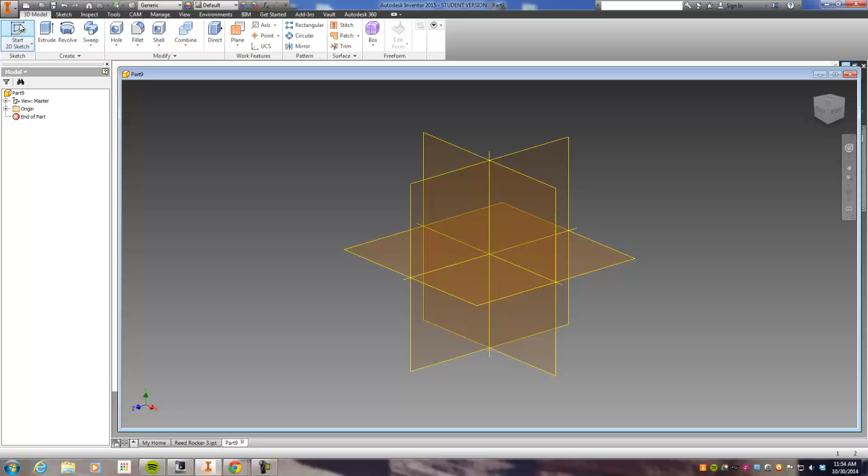I'm just going to click 2D Sketch, top part of that button, just pick this XY plane. It doesn't really matter where you start from, but here's a rectangle. Let's say the first piece you have to make is 18 inches, so you see this box is blue.

It says 0.960 - you can just type in right on your keyboard, 18 inches long, tab key, gives you the second box down there which is 2 inches wide, then hit enter. If you use the scroll wheel on your mouse, you can scroll in and out, and if you push the mouse button down you can grab hold and move it so you can see stuff. What I did right there is I made an 18 by 2 inch piece, and that's the side of one of the bird feeders, so that's it.

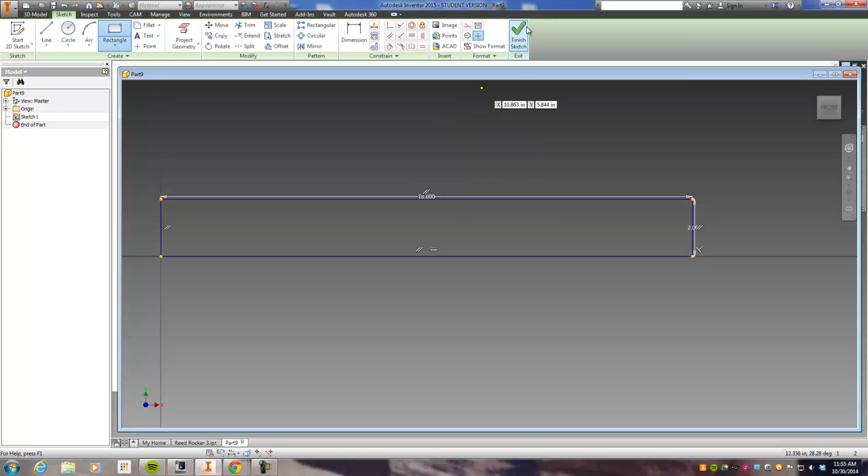So I can use the hotkey, which is E for extrude, or I can click finish sketch - zoom out a little bit so I see what I'm doing, and click extrude. All the thickness of this sheet metal is 1/16 of an inch, which is 0.0625, and then hit OK. That's it.

That's one of your parts. Save. Side, front, something like that. Save. Maybe you need a hole in this thing.

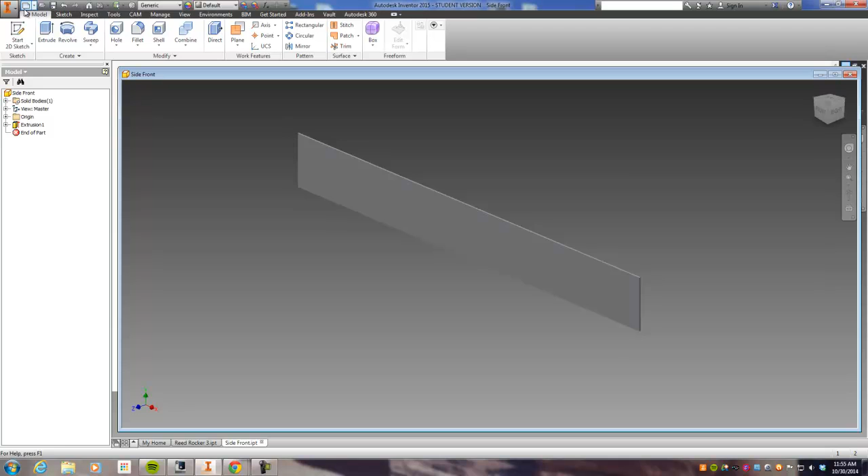We'll create another one, a whole new part file - that's one of your pieces. Now just repeat, make another one, and this one will be start 2D sketch.

Same thing, rectangle - I like to start from the origin, but you don't have to. This one is only 6 inches deep, 2 inches wide, and I'm getting all these dimensions from the sketch that I already created. But this one needs a little hole in the middle of it.

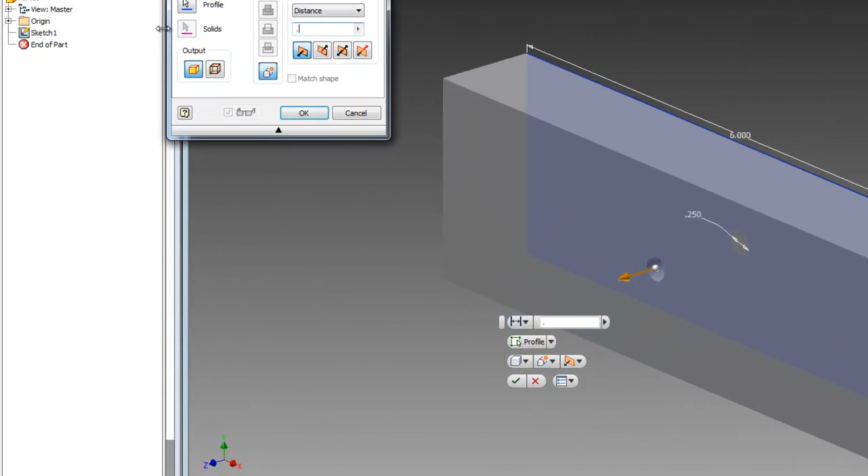So I'm just going to create a circle. I could go down and see these little hairlines that help you - that's the center of this thing. The hole is 1/4 of an inch because all the dowels are 1/4 of an inch, and then you'd just go finish sketch, extrude, 0.0625, enter, and now you have another piece made.

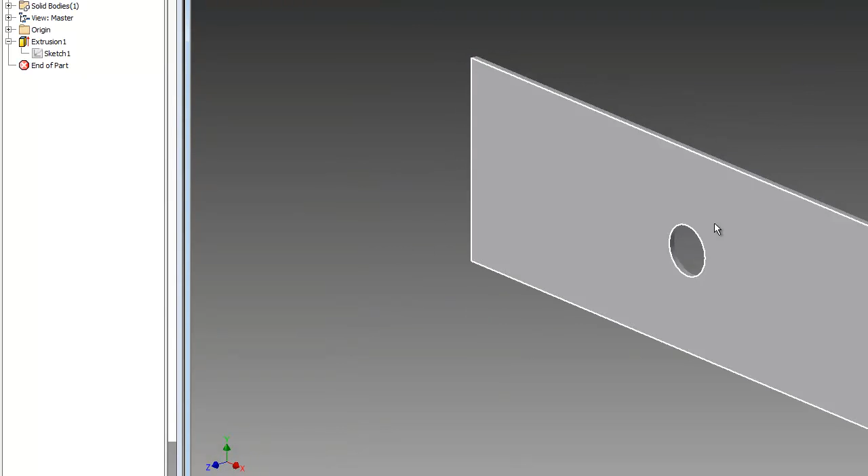If you ever have to go back and edit something, it's over here - the little plus sign of the extrusion you just made, and here's the sketch. You can double click it, it brings you back into that sketch. So if I ever need to fix something, like the size of that thing needs to be 1/2 inch for whatever reason, when I finish sketch it changes the hole. Okay, I'm going to fix that back.

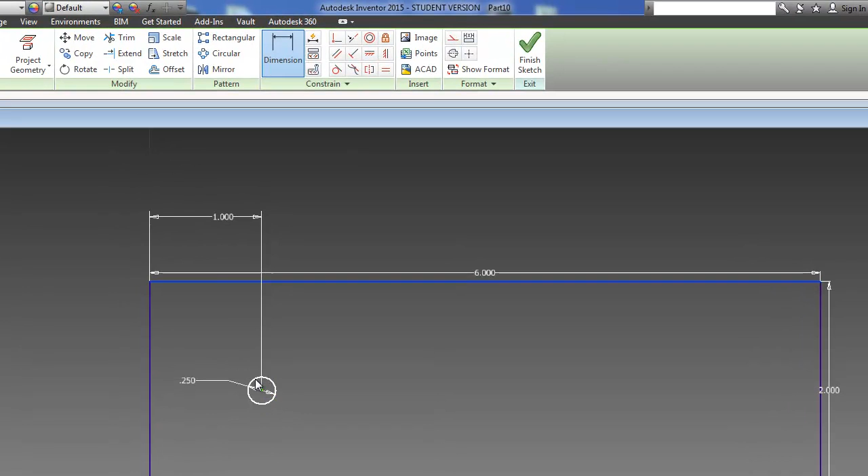Some of you might not be able to center things in the exact spot, so you might want to use the dimension tool right here and actually click on the circle and on the side and say, you know what, that actually is supposed to be 1 inch away. And from here to here is also supposed to be an inch as well. So that's another way to dimension and move stuff.

Other than that, you create every single part as a flat pattern, and once you have all your parts created and saved - this is part, this is side, left and right's the same one, so I'm just going to keep it like that.

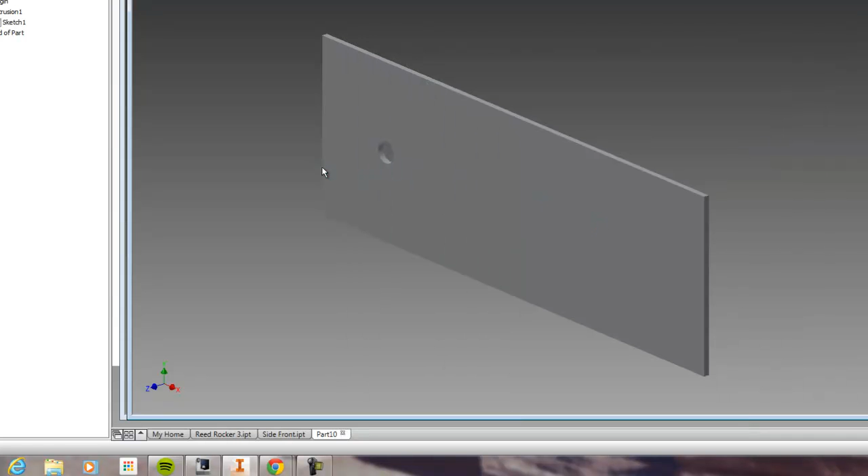Then the next step is to create a new standard IAM, create - this is the assembly protocol for how to actually assemble something. So you can just place whatever part you were just working on, open, that puts that part in.

Any of the other ones, just hit place, you can pick a different one on there, open. If there's 2 of those, you can click it again to place 2.

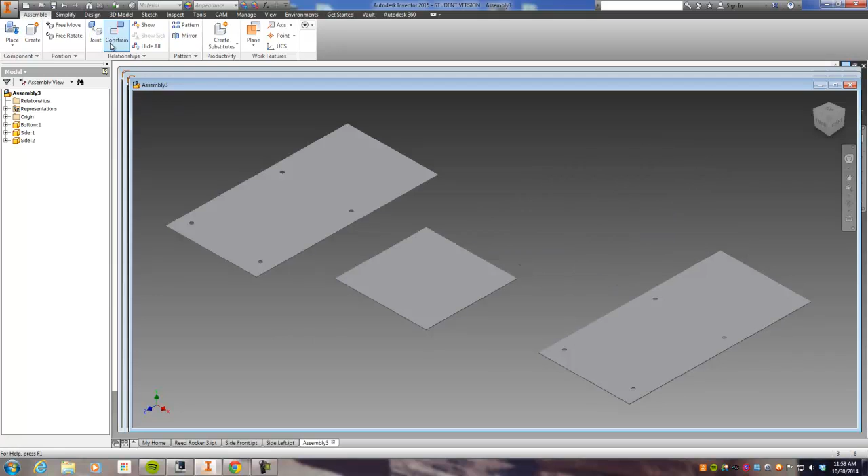You can right click and hit OK, and then it gets more complicated with the constrain tool. There's other people who can help you with this a little bit, but basically you need to have 3 constraints. And I would say, where are you going to put glue if you're going to set stuff together?

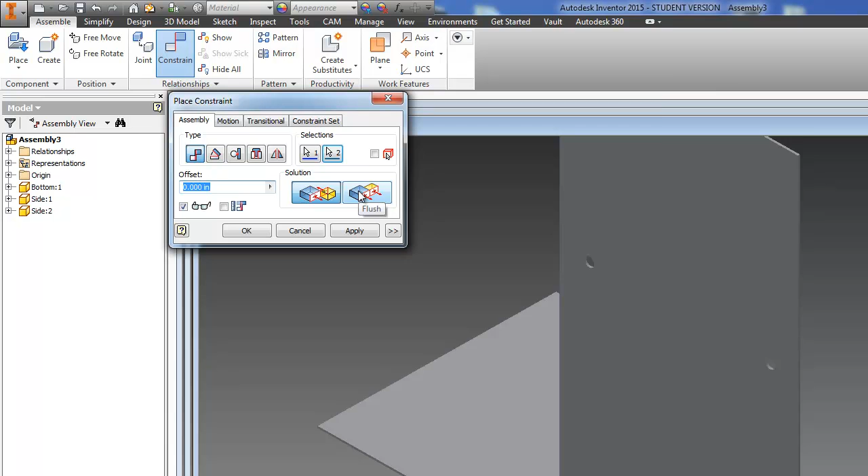So apply - you might have to hit the edge of this thing, the face of this thing, the face of this. That's going the opposite way, so that's a solution change to make it flush - now it's flush with each other. Apply this face with this outside face. That's good, apply, and that's it.

I can cancel out of that, so now you got that side put together. Repeat, repeat, repeat - if you ever have a problem with that, you can always hit the undo button as many times as you need to get back to start over. If you go back too far, just hit the redo button and life is good.

So good luck with creating your parts and creating your assembly to make sure this birdhouse is going to look like what it's supposed to look like before we actually cut everything out and try to weld it back in place. If we cut it, it costs us money - in here, if we mess it up, we can just fix it. A couple clicks, life is good.

But if it's not right here, it's definitely not going to be right when you cut it out on the CNC table. And if that's the case, you won't get a quality product, and we'll be wasting money. So good luck with the process - if you have questions, help each other out.